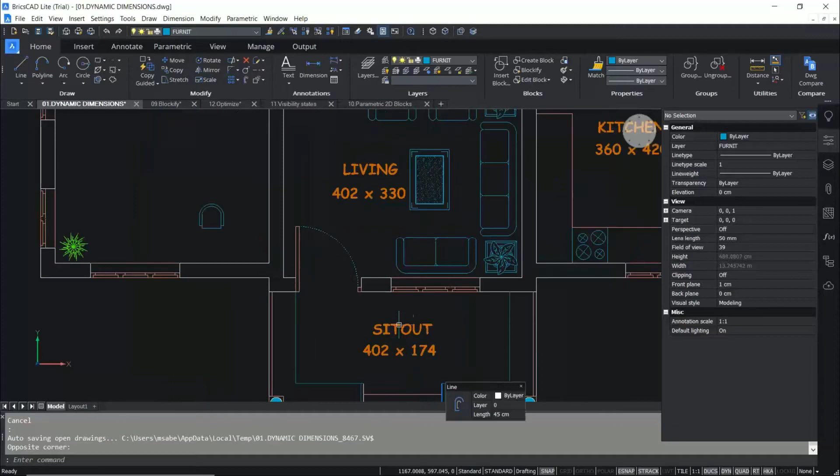First of all, I'll start with dynamic dimensions. Dynamic dimension is a smart feature in BricsCAD with which you will get an interface to specify the length and angle while you create a linear entity.

I'll illustrate it with a simple line. I'll draw a line from here. Now you can see that the length and the inclination of the line is getting dynamically updated. Suppose I want to draw a line with a length of 120 units - I can type that distance, and simply by typing the tab key, I can give the angle, I can specify the angle. Now that line is constructed. So on the go, you could specify the dimensions and create such an entity.

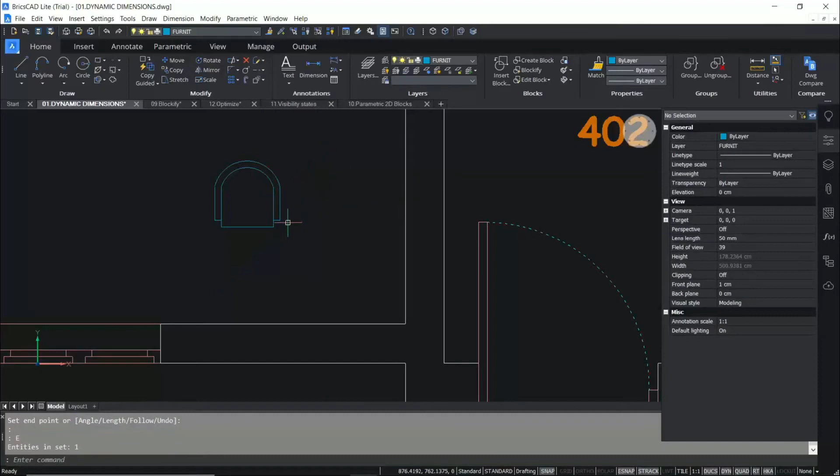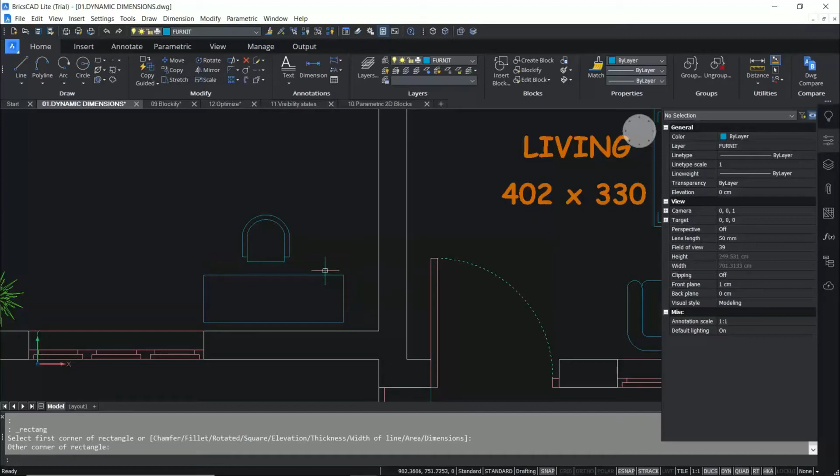Now I'll create a table over here. It's a living room, and we have a chair over here, and I would like to create a table with specified dimensions. So I'll start with a rectangle, and I'll start from this particular corner, and the dynamic dimensions are displayed here. I would like the length of the table to be 120 and the width of the table to be 40 units. Now you can easily and flexibly create such a table. So that is the advantage of inputting dynamic dimensions - whenever you construct a linear entity, this interface will dynamically show the dimensions, which will help you save a lot of time and effort.

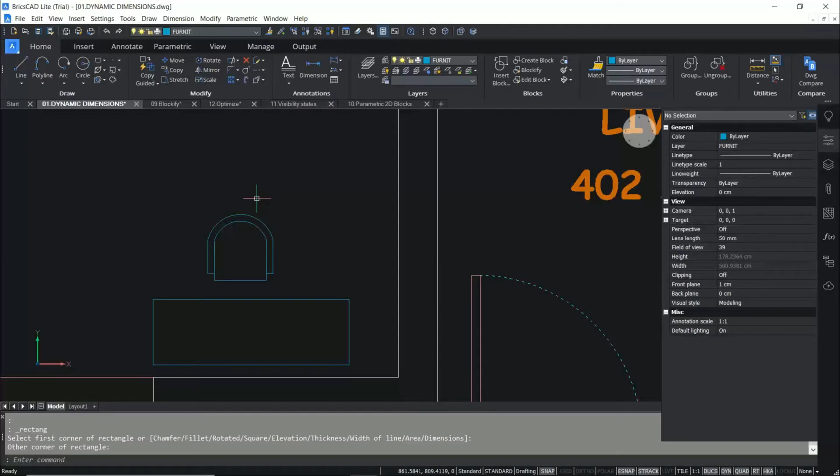Okay, now we come to the next feature called nearest distance. As per the nearest distance, you can dynamically view and change the distance between any two selected entities.

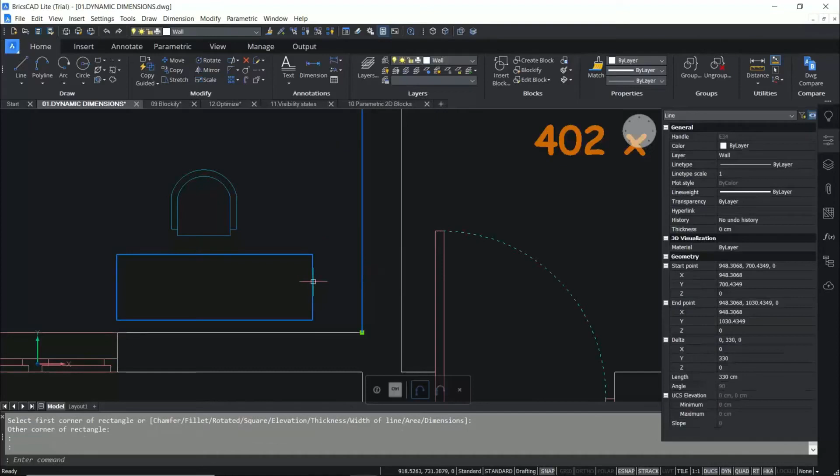For example, I want to move this table slightly towards the wall so that the distance between the wall and the table will be 10 units. All I have to do is select the first entity, which is the wall line, and the second entity, which is the edge of the table. The moment you select these two objects, you will see the distance displayed.

Now I'll change the distance by inputting a value of say 10 units. I'll give 10, and you can see the direction of the arrow here. So the second object will get moved in the direction of the arrow. I'll just give an enter.

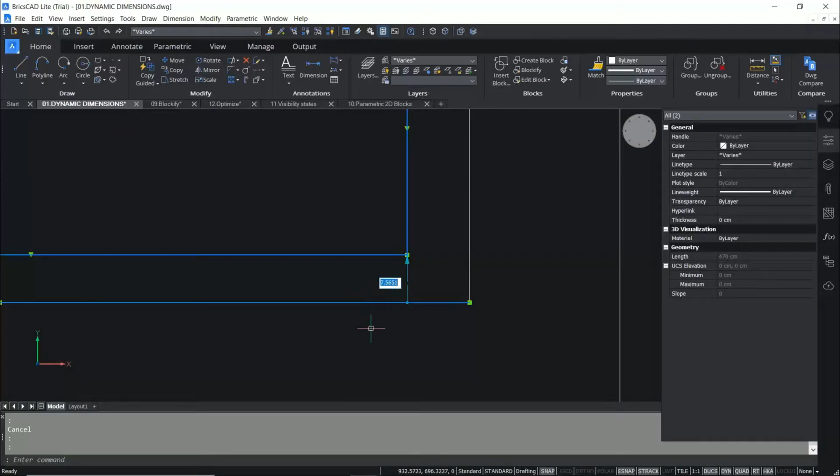So it is moved. Now I would like to again change this distance between this wall and this edge of the table, and you have got the distance displayed, and I would like to change that distance again to 10 units. So if you select any two entities, it will dynamically show the distance, and the second selected entity will get moved based on the distance value specified by you.

Even if it appears like a simple feature, it will help you save a lot of time, because you'll be doing this procedure repetitively whenever you create a drawing, such as a building plan. Okay, so that's a smart feature.

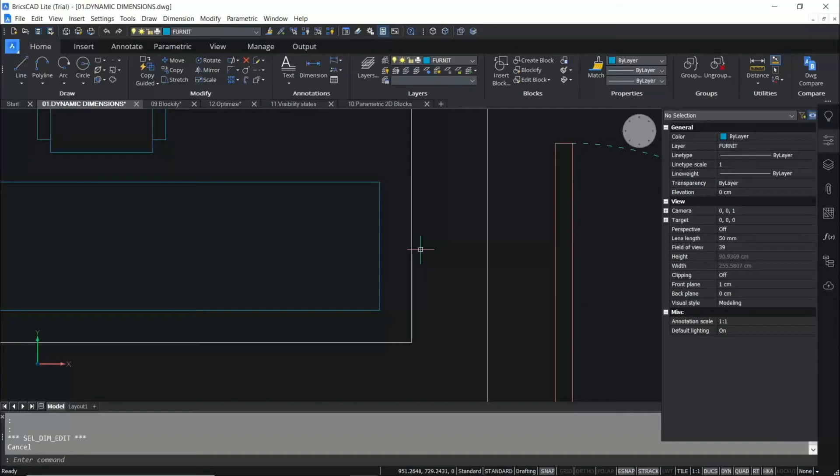Now we'll come to the rollover tips. Rollover tips in the BricsCAD interface shows everything that you need and nothing that you don't. That is, you can get properties and parameters by simply hovering the cursor over an entity.

For example, let me take this particular table. When I take the cursor onto this table, you know that it's a circle. The moment you hover the cursor onto this table, it will show you properties such as color and the layer in which it is created, and it will also show you parameters such as its radius and area.

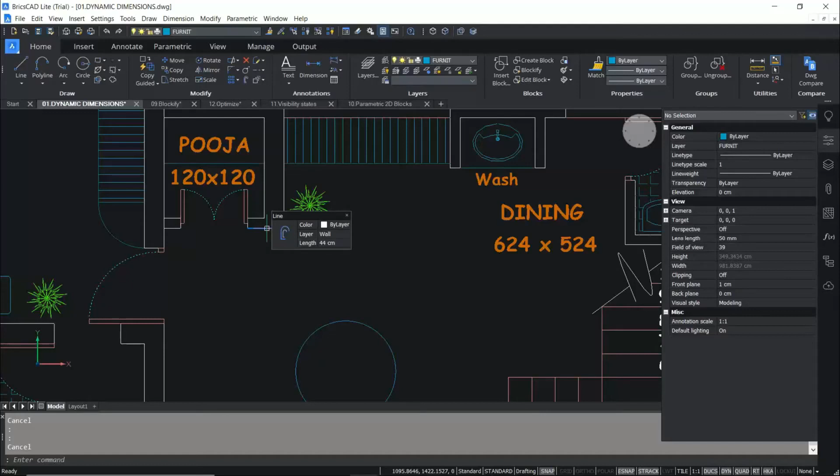So based on the object that is selected, the software immediately gives you these rollover tips. For example, if I take the cursor onto this line, then the parameter you always need, the length, is shown. Now, if I take the cursor onto this text, then you need the parameter as the height.

Now, you can always get extended properties and parameters from the properties panel, which is ready here. So when you select this object, the properties panel will show you a whole lot of parameters, properties such as color, layer, line type scale, plot scale, line type transparency, as well as all the creation parameters.

So this rollover tips feature is again a time saver, because at any point of time, you can get relevant information such as the area, length, radius, etc.

Now we come to the next smart feature, which, to be frank, I haven't seen in any of the CAD softwares I have worked with so far. And this feature is actually built-in, because of the built-in intelligence incorporated in the software. The software, according to me, thinks ahead of you.

If you use this feature, you can save a lot of time and effort by saving mouse movements, unnecessary keystrokes, and all that. The feature is called the quad cursor menu.

I'll explain it with the help of the same circle. I'll take the cursor onto the circle and you will see the quad here. You can get the quad even otherwise, even without hovering on an object, simply by right-clicking the mouse on the screen.

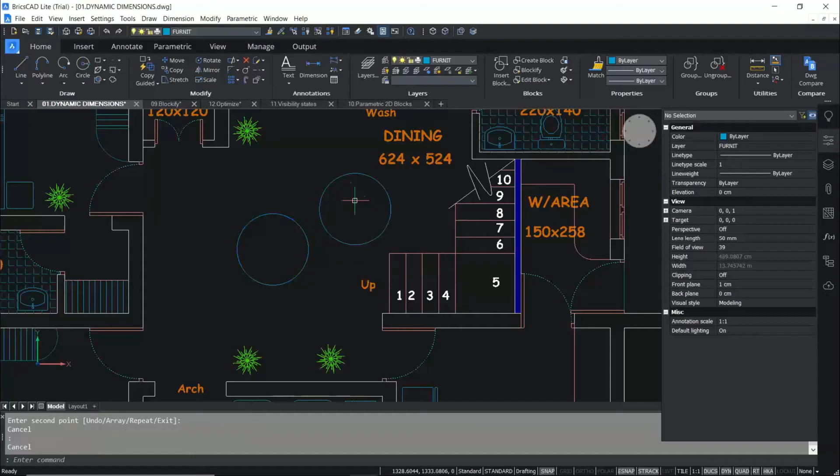Now, this is how you make use of the quad cursor, quad menu. And this quad menu, as I told you before, is a very handy interface which will let you save a lot of time and effort, and it's a real good productivity tool. Now we come to the next smart feature, which is called a hotkey assistant. Hotkey assistant, now I'll erase the circle.

Now, hotkey assistant will give you hotkeys whenever you hover a cursor on an entity. I'll hover the cursor onto this particular rectangle. So you can see a small menu appearing underneath, which starts with control. Then I think you can see that control. And then the first selection is the entity selection, and the second selection is the sub-entity selection.

That means if I make a click now, this entire rectangle will get selected, which is the entity, which is nothing but a polyline. Suppose you want to select a particular segment from here, all you have to do is just hold on the control key, and you have moved on to the sub-segment or sub-entity level selection. Now you have selected only this particular segment of the polyline.

Now, by combining the quad, you can choose only those specific operations that can be done onto that particular sub-entity, which is the segment of a polyline. Suppose you want, you can add a vertex right at the middle of this segment. So I'll just click on that, and I have inserted a vertex right at the middle.

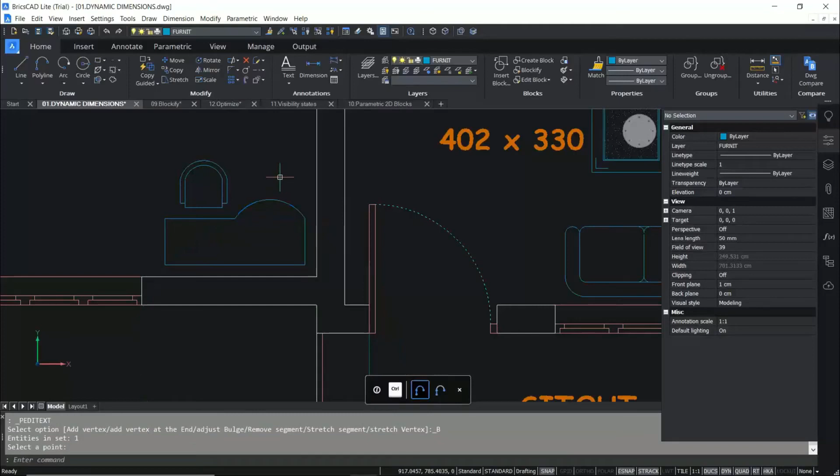Now I'll again move on to this. Again, I'll hover the cursor. I've got the same hotkeys. I'll hold down the control key. Now the subselection will let me select that particular subdivided segment. Now I'm going to execute some editing operation like changing the bulge of that particular segment. So click on that. I have changed the bulge. Thereby, I have altered the shape of that table. So it's all at your fingertips.

As I've told you before, Hotkey Assistant is a very powerful feature using which you can decide whether you have to select the object as a whole, or you have to move on to the sub-object level, and you can incorporate all the necessary editing operations which are specific to that sub-object. So that's a very fabulous feature, Hotkey Assistant.

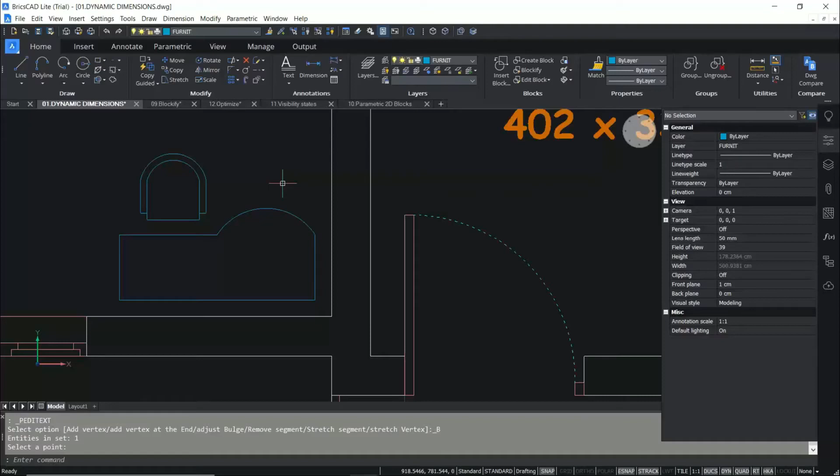And now we come to the next smart feature in BricsCAD, that is called real-time boundary detection. So BricsCAD has got the capability to detect the boundaries in real time. That is a real time saver, according to me, because in other softwares, in order to trace the boundaries, you have to give some additional boundary creation commands.

And boundary creation is always required in computer-aided design because these profiles, which are boundaries, can be used to perform some area calculation and things like that. Now, I'm going to activate this enable boundary detection option over here on top. Now, after that, if you take the cursor onto this, you can see that that boundary is identified. Okay, now I'll create a circle right at the middle of this arc.

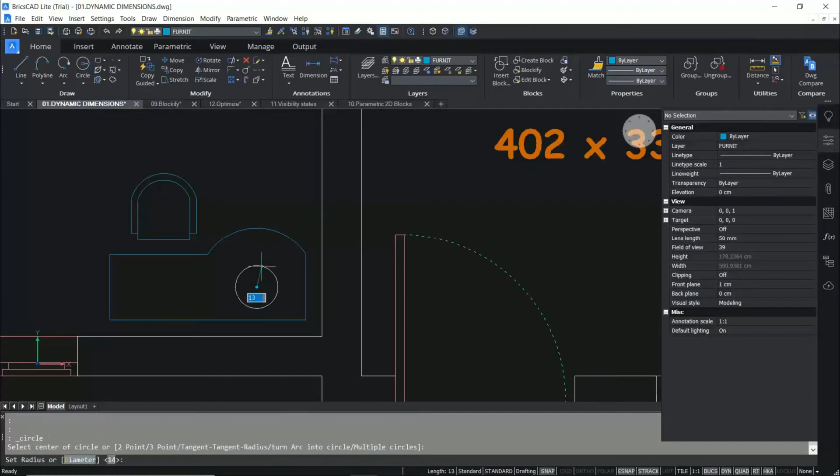Okay, now you can see that simply by hovering the cursor onto this area, that particular annular portion is identified. If I keep it here, that portion is identified, and not only has it identified it, it will highlight it by shading that area. You will also get information such as perimeter, area, etc. So that particular shaded portion's perimeter and area is instantly displayed.

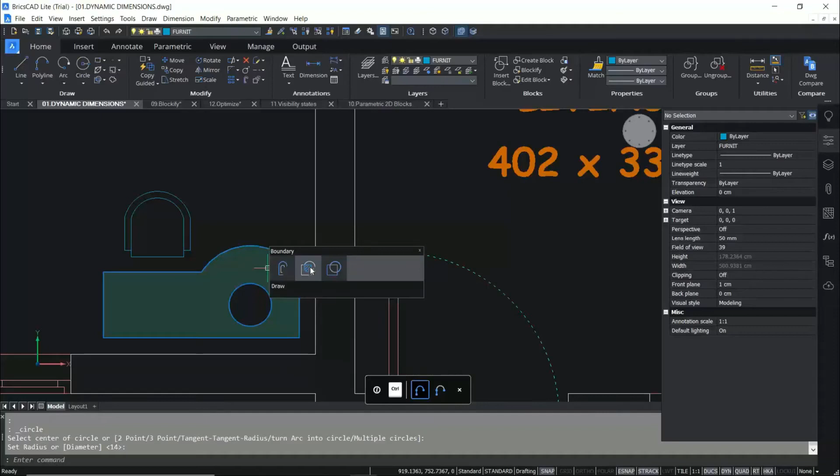Okay. Now, not only that, using the Quad, you can perform a lot of other tasks. For example, you can offset this particular rectangle, this particular profile, through an offset distance. Okay, so we have offset it. Now I would like to perform another operation. I'll hover the cursor onto the circle. Now you can perform a hatching. Just click and it is hatched. Whereas in other CAD software, you have to invoke the hatch command to hatch that area.

So simply by detecting the boundaries, you can see the boundaries highlighted, you can calculate the area and perimeter of that boundary, and you can also do some of the most relevant editing operations such as offsetting the boundary, and you can also perform hatching at any desired area inside the boundary. So these are all a mouse click away. It's that smart. I'm sure you will definitely enjoy the real-time boundary detection in BricsCAD because it's a really good productivity tool.

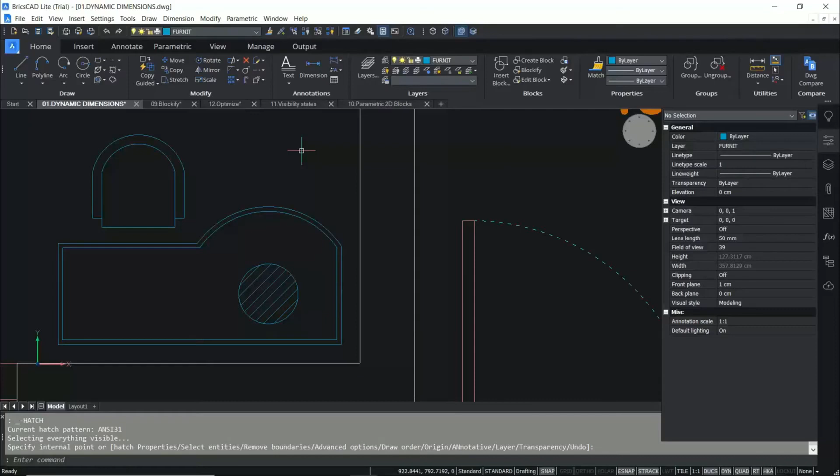Thanks, Abir. Yeah, those are really great tools that you showed us just now. They're a great start on some of the tools that you wanted to show today. I'm also really excited about that boundary detection, which I also use a lot. I know that you were also quite excited about some of the other tools relating to copying and moving entities, which are two of the most commonly used commands in the industry. So do you mind showing us those tools that can help us copy and move entities in a smarter way?

Yes, Claire, I'll demonstrate that feature. That is one of my favorite features. Copying and moving objects are among the most commonly used editing commands in any CAD software, and we are quite used to the normal conventional copy command. I'll demonstrate that first so that you'll be able to appreciate the copy guided feature better. So first of all, I'll execute the normal copy command. I would like to copy this window from here onto this vertical wall.

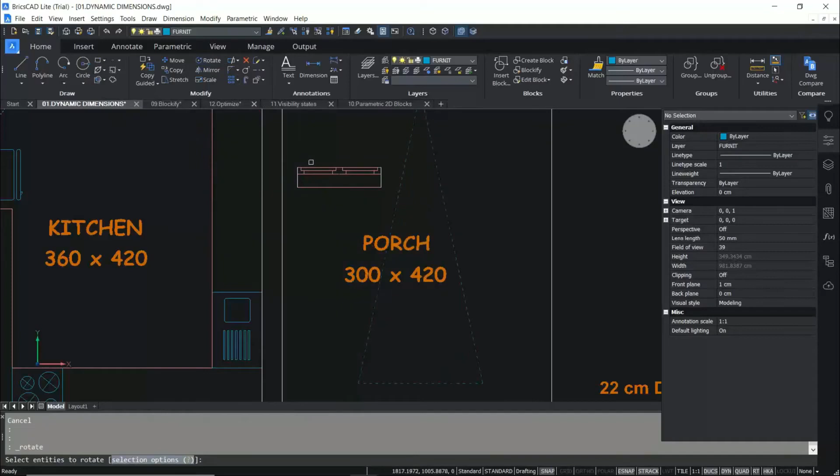So you give the copy command, select the base point, and take the cursor onto this area. Then you have to give a rotate command, select the base point, give a rotation angle, then again you have to move it. Okay, these are the conventional tasks. In the process of bringing that window onto that wall, I have to use 3 editing commands. Or else the alternative is to block it, then insert it. But even blocking and insertion need some time, and there are some procedures involved.

But in copy guided, that's not the case. All these operations can be done in a much smarter and more intelligent way. So I'll go to copy guided and select this window. After selecting the entities in copy guided, their relationship to their reference curve will automatically guide you in inserting them at different similar locations. So this particular line is the guideline which I have selected. I'll repeat it once more. I'll start copy guided and select the object within a window.

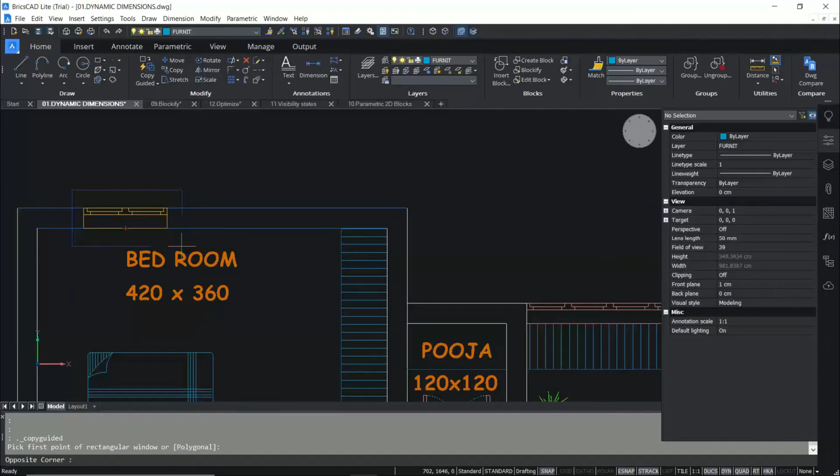While selecting it, you can see that the color of the two wall lines changed to blue, which means those two wall lines are guide curves. And now you can see the arrows here. This is the normal state when you keep it here. But when it comes to this area, see, it is getting automatically aligned with that area. Now I'll just insert a copy of it here and one more copy here.

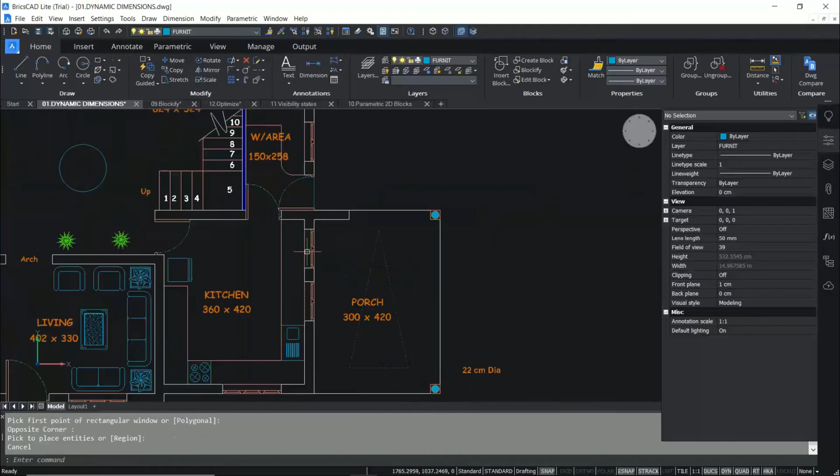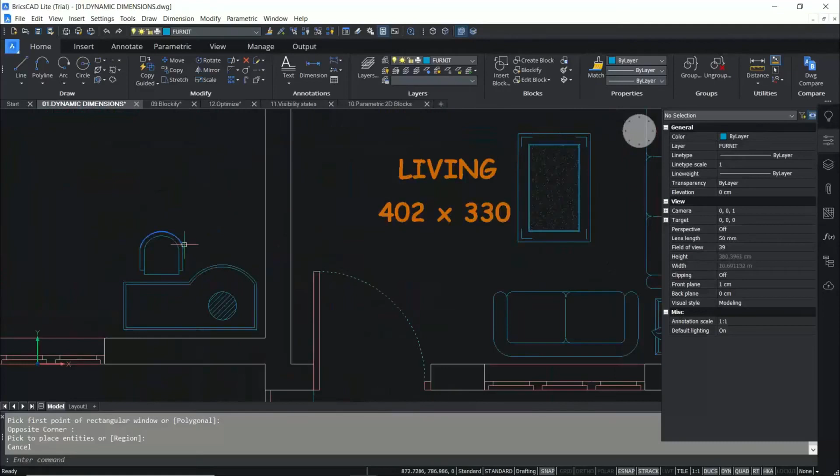And not only that, it has cleared this area. It has performed all sorts of cleanups. Otherwise, after inserting, you have to perform trimming, erasing and all, right? You have saved a lot of time because the cleanups are done simultaneously. So copy guided is a very powerful and intelligent feature. And I'll illustrate copy guided with one more example.

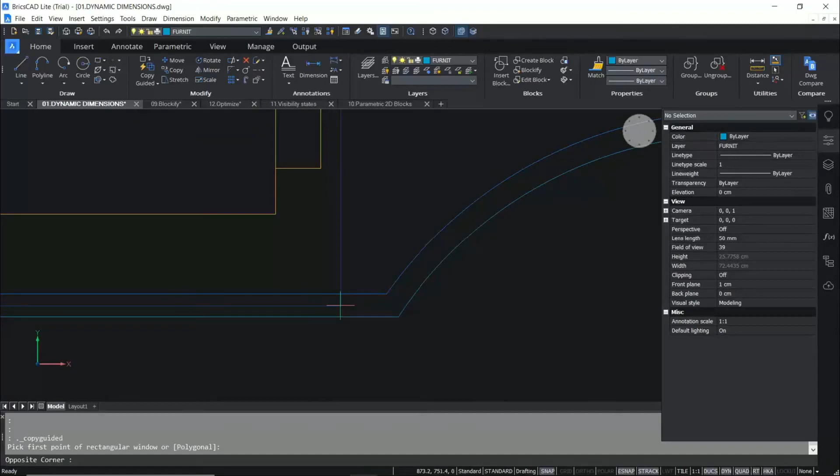Let me just copy this chair. So I'll go to copy guided and select this chair using a standard window. This time I'm going to use this edge as the guideline. You can see that the color of that particular edge changed. Now I'm going to place this around this dining table.

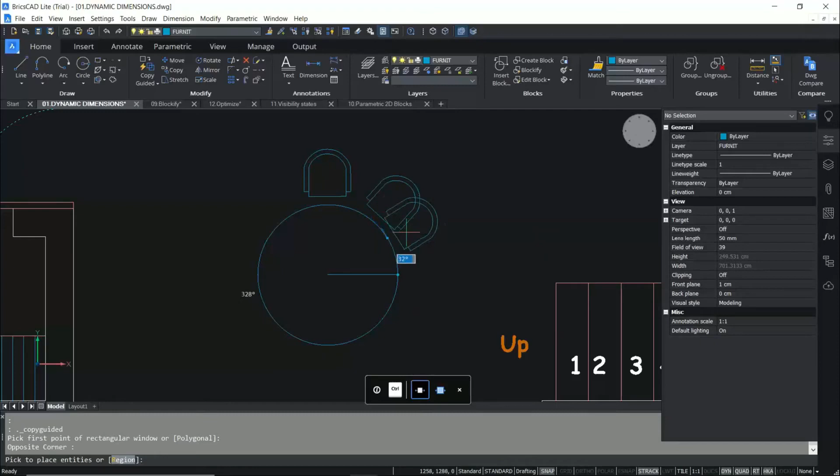You can see that it is aligned automatically along a curve, because the shape of the dining table is circular. Now I can specify an angle to precisely locate it. So it's 90 degrees, it is located at 48 degrees, and it is 0 degrees. Likewise, simply by moving it, you can align it along that circular path. So this is the power of copy guided. There is no limit to its application. I'm strongly convinced that it is a real time saver because it replaces several editing commands.

Now we come to Move Guided, which is a relatively new feature because it was introduced in the latest version, V21 of BricsCAD. It is similar to Copy Guided, but after selecting entities, their relation to their reference curve will automatically guide you to moving the entities to a similar location. In Copy Guided you copy it, whereas in Move Guided you move it. That's the difference. In addition, Move Guided will also let you simply perform cleanups in a given area. Let's see that first.

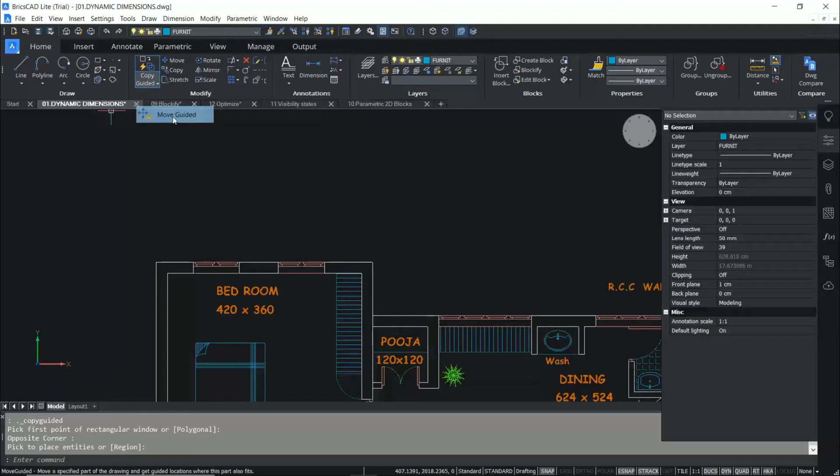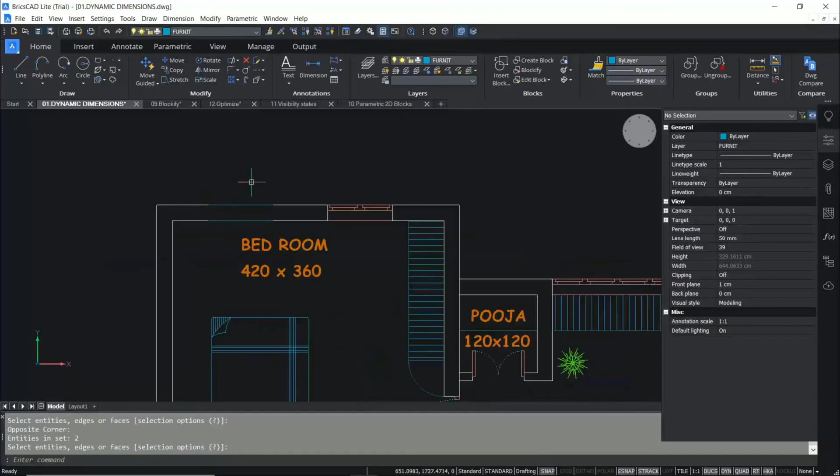So I'll go for Move Guided from here. Now I'll select this window. Suppose I don't want that window there. Conventionally, you have to erase it. Let's see the conventional procedure. I'll erase this first conventionally. Then there's a gap. I have to fill it by drawing lines. Then I have to erase these vertical lines. So this is the procedure involved.

Whereas if you use Move Guided, all you have to do is click on the Move Guided command, select it using a standard window, and just locate it outside the drawing. See what happened. All the patch-ups, cleanups, everything is done in one go. So this is one of the basic applications of this command, which has attracted me.

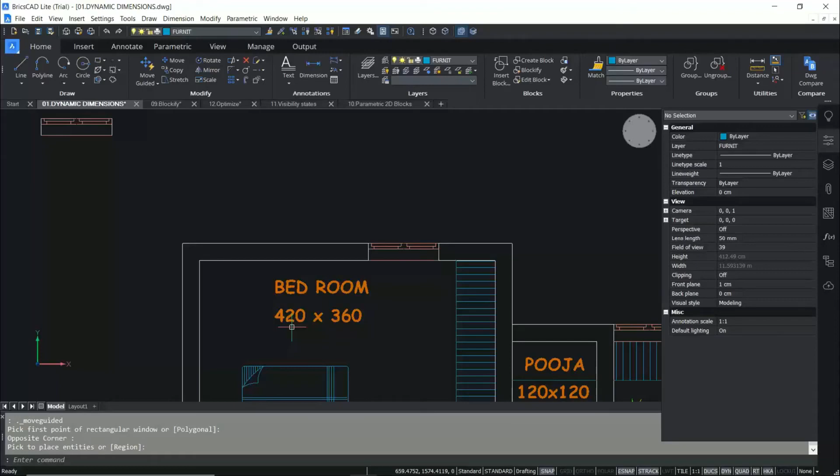Another thing, of course, you can move it and locate it precisely at a different location. For example, I'll move this using the Move Guided command. I'll select this window. Now I would like to keep it right here. See, it has been located at the different location. Orientation is properly adjusted, and the cleanup is also automatically done in the area from where it was taken. So everything in one go. See how much time and effort you have saved.

So Move Guided is one of the fabulous features of the latest version of BricsCAD V21, and in fact you can explore these features on your own, because you can download BricsCAD. You will get a 30-day trial version. You can try out these features. It's very simple but very powerful.

Now, Claire, do you want to say something? Yeah. Looks great, Sabir. Move Guided is really impressive. I share your sentiments about Move Guided. It's really cool, and it saves a lot of time. And I know that you still want to show us more features that pertain to blocks, parameters, and other optimization tools. I see you still have a lot of files there ready for us to see the magic. So proceed. Just show us what you've got. Okay, thank you, Claire. I'll move ahead.

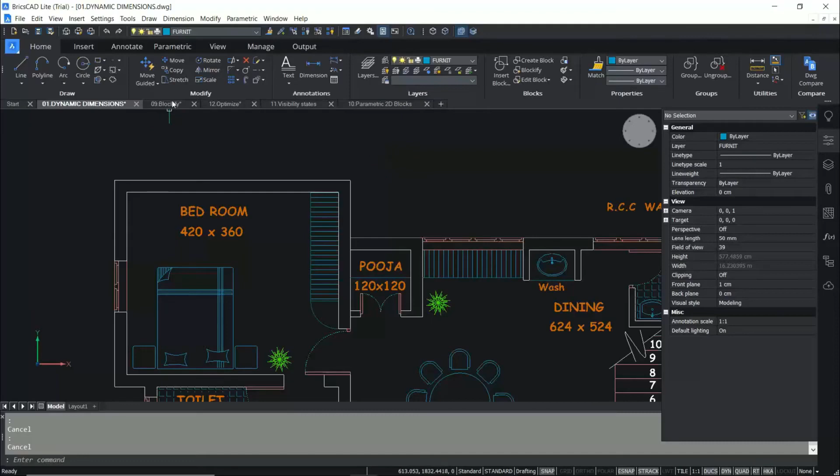Now we'll see another fabulous feature in BricsCAD, that is Blockify. Blockify will let you create a block. The software will automatically create a block for the user after identifying similar geometry in a drawing. For some of you it may be a new feature, I'm sure. I haven't seen this feature in any other CAD software. Putting it simply, it's just the opposite of the Explode command.

I've received several queries from my students, because at times, to reduce the file size, they explode almost all blocks in a drawing, since that is one of the procedures by which you can reduce file size. After exploding, at some point they change their mind and want to convert all these objects back to blocks. That's a helpless situation. Whereas Blockify is a feature which will let you do this.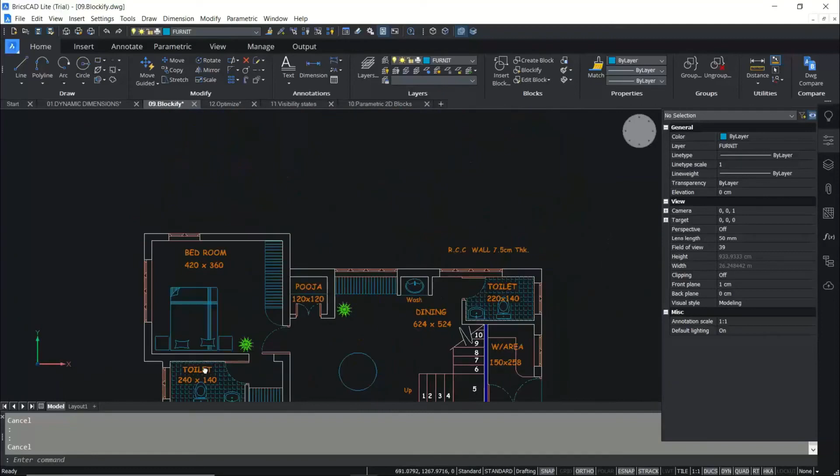I'll show you that. You just click on Blockify and I'll select this particular 2-panel window. I've got several such windows in this drawing, but these windows are in the exploded state, so they are all different objects. This is one window, second, third one. Likewise, I have the fourth, fifth, several such windows. It's a double-storied residence plan. So I'll go to Blockify and I'll select this object, this window.

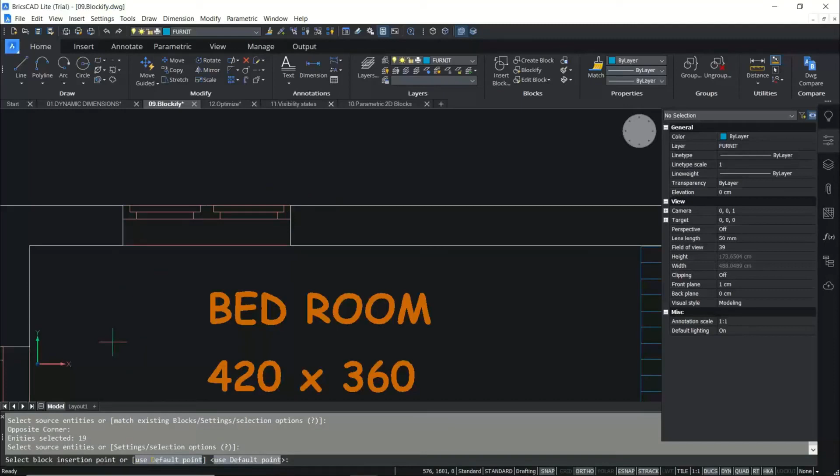Okay, now it'll ask you for the block insertion point, because a block is going to be created. So obviously you have to specify the insertion point, right? So I'll pick this insertion point. Then it'll ask you where you want to search it. I want to search for the similar geometry in the entire drawing, right? It will scan the entire drawing. So entire drawing is the default setting here. So you can just give an enter.

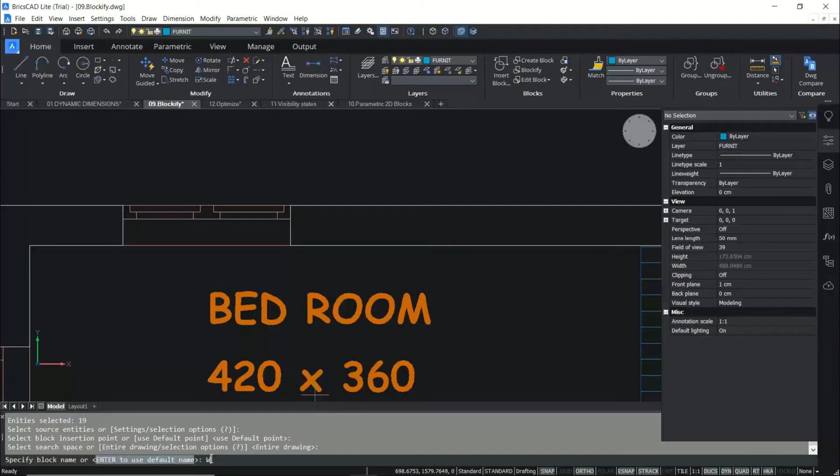Now it'll ask you for a block name. Obviously you have to give a block name because you're going to create a block. So I'll say W2. It's a 2-panel window. Now just give an enter. See, it has scanned the entire drawing and the number of block inserts is 9, because the software has identified 9 similar geometries in the drawing.

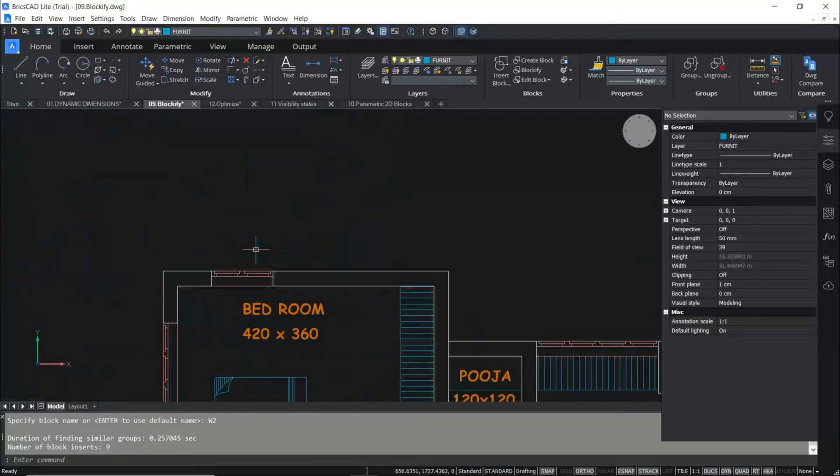Okay, let's manually first locate it. This is a block already. And this is again a block. Even this is a block. Now there's a feature in Quad. I'll select it and I'll go to the select menu in Quad. Here you have an option called select similar, which will let you select similar objects. In one go, you have selected all the similar objects in the drawing. So here also we have it.

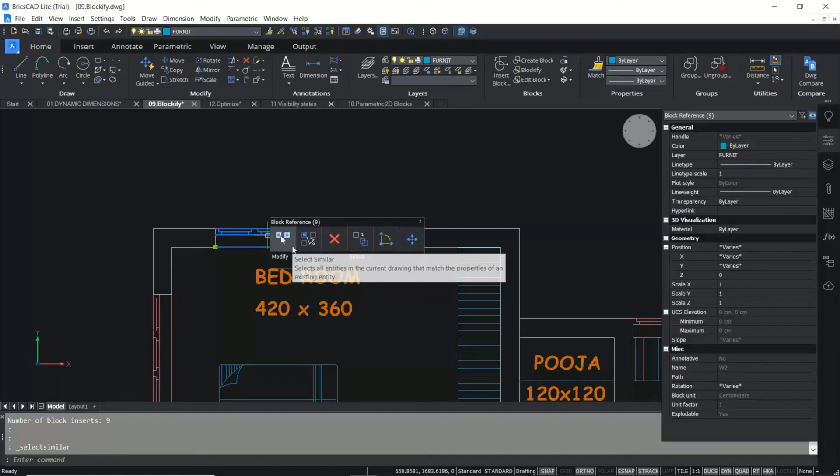Now you can isolate it. So I'll go to modify, select. Then you can isolate the selected objects. Just click on that. See, you have isolated all the selected objects. And all these are blocks. Okay. These are all blocks. So as I told you before, you have just done the opposite of explode by blockifying the objects.

And another interesting feature of Blockify is that it's so fast and accurate, no matter how complex the object is. For example, this particular tree, which I've kept in the interior of the house, is made up of several objects, right? It is not following any pattern. It's all scattered because it's a representation of a tree. Let's see how we can blockify this.

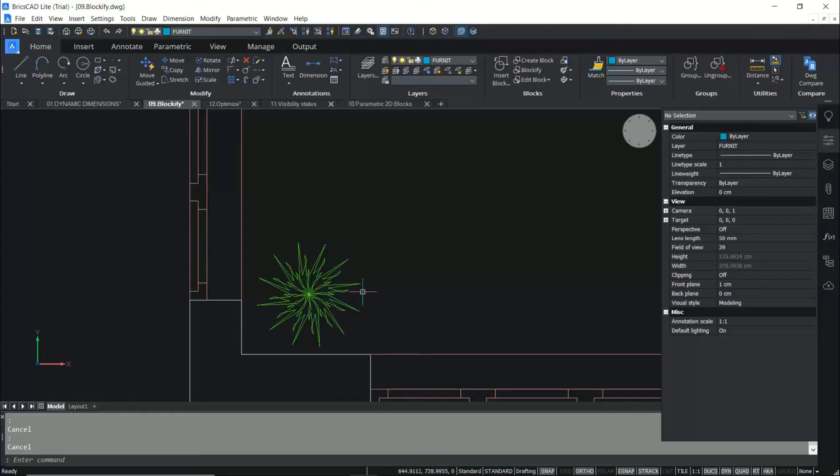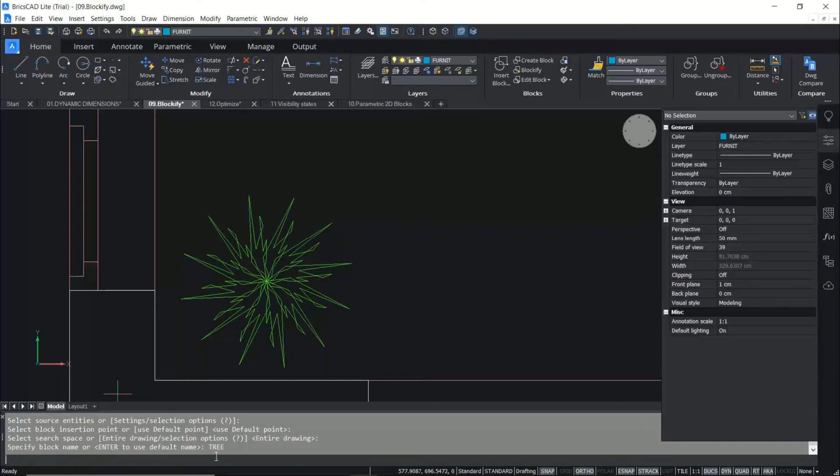So I'll click on Blockify and I'll select this tree. Okay. Then it'll ask you for the insertion point. I'll define it right at the center of this tree. Then I'll take the entire drawing. Now I'll give a name. I'll call it tree. 12 trees are identified. See, it's all done in 1 second. You should remember it. And that's the processing speed of this software.

There's another feature which has attracted me. Okay, I would like to say something about the processing power of BricsCAD because it's a different kind of coding which is done in the software. Okay, so the coding is compacted. The file size of the software is very small. It occupies less memory space when you compare it to other CAD softwares. That is one of the features which has attracted me.

Okay, if the memory space is less and if the memory management is optimal, then obviously the performance of the software will also be much better in a given platform. Okay, so even on low-end machines, you can install BricsCAD. When you compare it to other softwares, it will give you better performance.

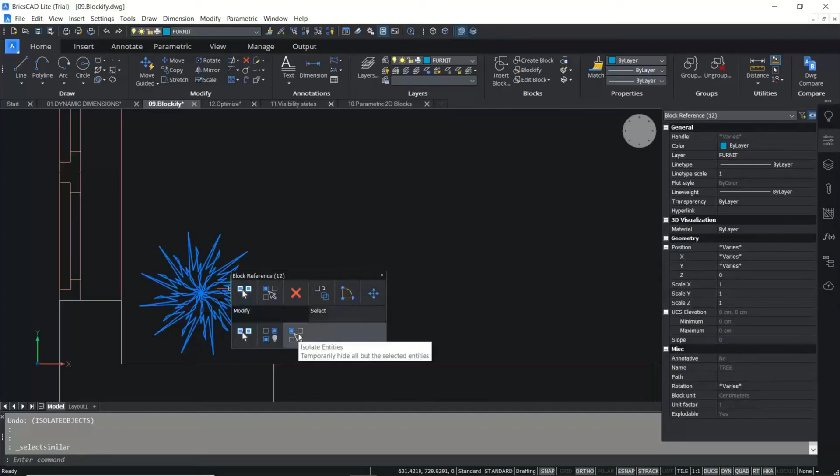Now coming to, I'll select this. No, let me just repeat the same process of steps which I've done before. Sorry, I'll select this. I'll go to select similar, then select. I'll go to isolate entities. See, all these interior trees are converted to individual blocks. So that is the Blockify feature, one of my favorite features in BricsCAD.

Now we come to another very interesting feature in BricsCAD, that is called parametric 2D blocks. At least some of you must have used dynamic blocks, right? You know the capability and functionality of dynamic blocks. Dynamic blocks will let you perform some extended tasks inside a block. Sometimes you may also be in a position to incorporate a little bit of intelligence in the block, but you have to do a lot of tasks for that in dynamic blocks.

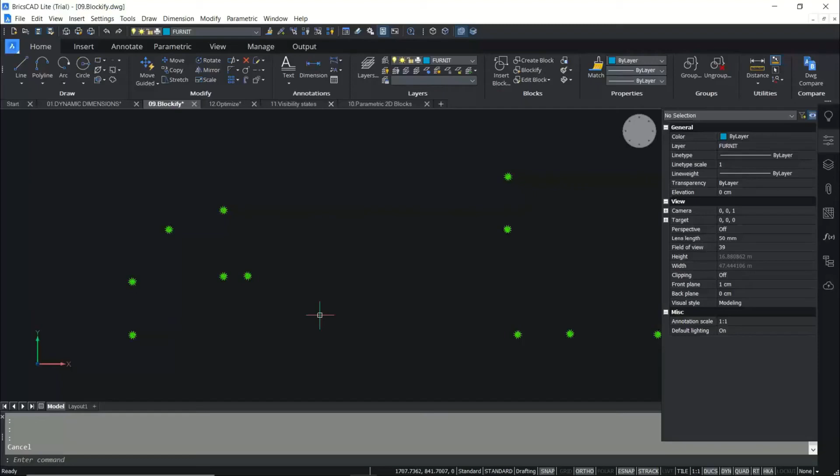Whereas here, let's say parametric blocks. So I'll click on parametric blocks. I'll explain it with this particular office drawing. It's an office floor plan, and we have a number of tables and chairs over here. And there are different designs of chairs. What I'll do is I'll choose this particular office chair. And you know that when you click on it, it's all made up of several individual objects. It's clear that it is not a block.

So first of all, I'll blockify this object. So I'll click on Blockify and select all the entities in the chair. And I'll just give an enter. There are 21 entities in this. And now I'll give an enter. Now it will ask you for a block insertion point. I'll choose this point as the block insertion point. Then I want the entire drawing to be scanned. Okay, now it will ask you for a block name. I'll call it office chair.

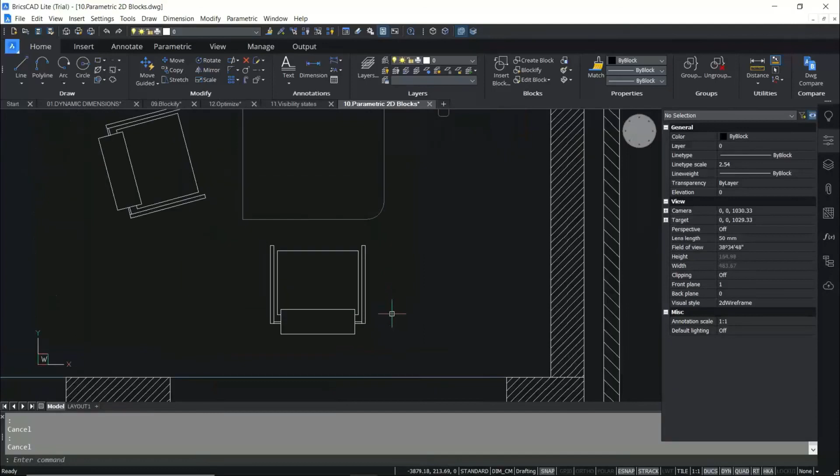Oh, it's converted already. It's okay. Fine. Now this is a block, and this is again a block. It's a similar object. Okay, it's again a block. Fine. Now what I'll do is I'm going to edit the block. In BricsCAD, you can simply edit a block by double-clicking on the block. Just double-click. You will get the block editor here.

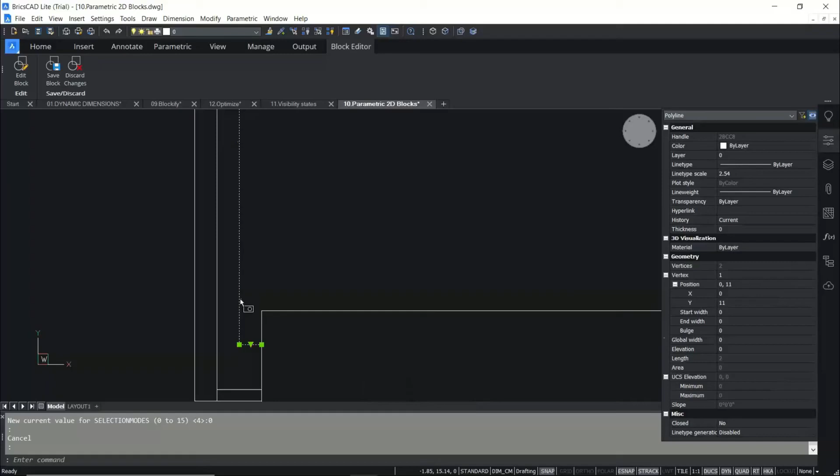And I'll just give OK. Okay, there's a block editor interface. Now what I'll do is I'll select a few entities in this. I'll select this horizontal, this vertical line, and this vertical line, this one, and this one. Now, if you go to parameters and constraints, you can see that none of these objects are constrained and there are no parameters associated.

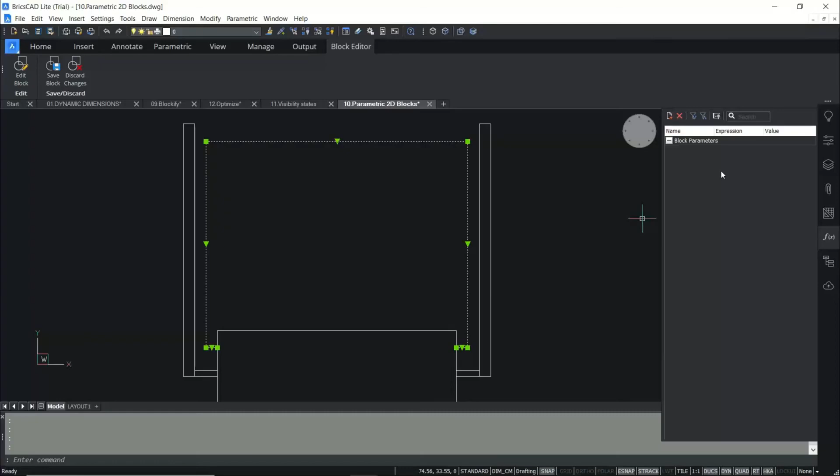Now I'm going to give an auto constraint. It's a very simple task. You go to parametric and here we have an auto constraint feature right on top. Just click on that. The moment you click on that, you will see two constraints, the two parameters displayed here. One is D1, which is 46. D1 you can take, for example, as the length of the chair, and D2 you can consider as the width of the chair.

So you have to give some meaningful names here for your understanding. So what I'll do is I'll just double click and rename this. So I'll call D1 as length, and I'll double click and I'll call D2 as width.

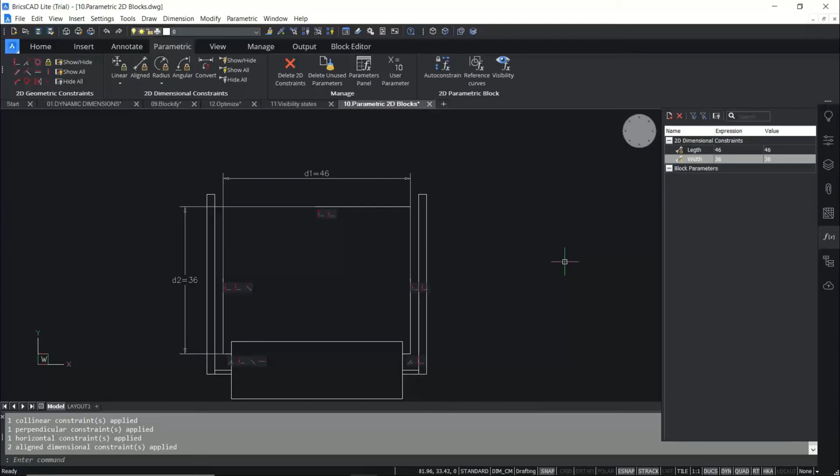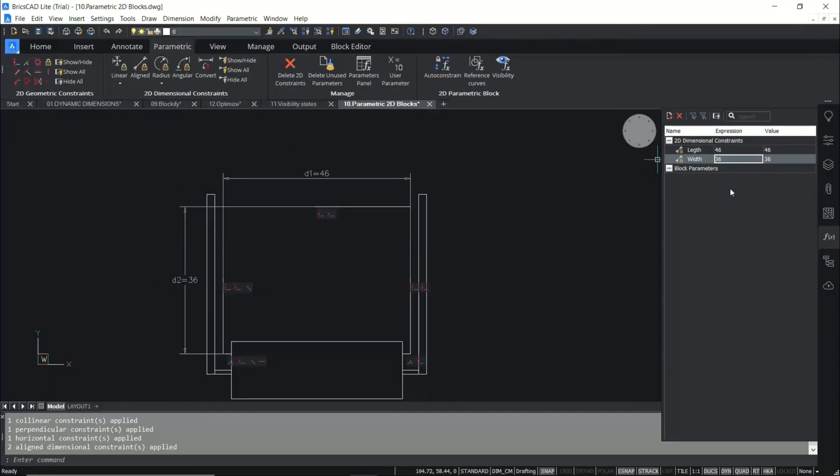Now, if you need any clarifications on these parameters, you can dynamically see these parameters changing by animating it. So just select the length, right click and animate. This is the length. It will show you an animation, so you can be sure that it is the length. And right click and animate, it is the width. Now I'm going to save this block. So I'll go to block editor and I'll save the block.

So you can see that these parameters are attached to all the blocks which you have defined. But that is not the end. What you can do is you can select any desired blocks. For example, I'll select this block and this block. For these two blocks, I would like to change the width. I would like to increase the width.

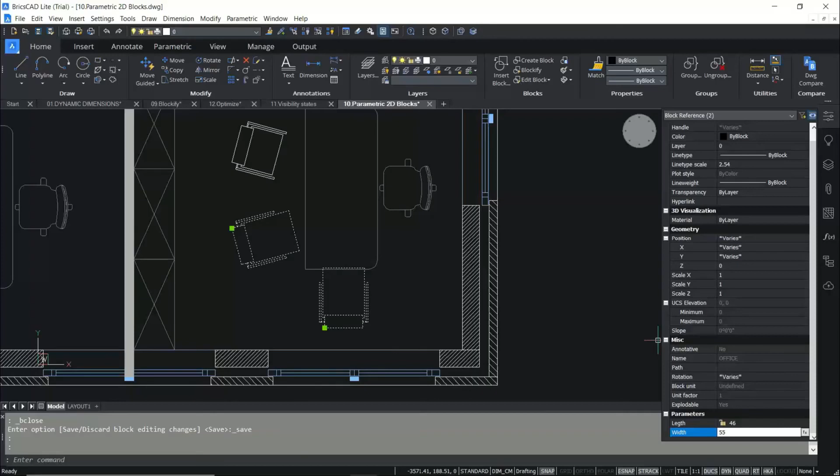So what I'll do is I'll go to the properties panel, and the width parameter is 36. Just concentrate on these two chairs. I'll make it, say, 55. So you can see that these two chairs' width has dynamically changed. How cool is it, right? You don't have to go through the procedures we normally do in dynamic blocks. It's so simple.

I'll just recapitulate what I've done. I've first converted these lines in the chair into blocks. Then I edited the block. Then I auto constrained it. Then two constraints are attached, length and width. I've renamed them, animated them, saved the block. Then simply by using the properties panel, I have changed the parameters.

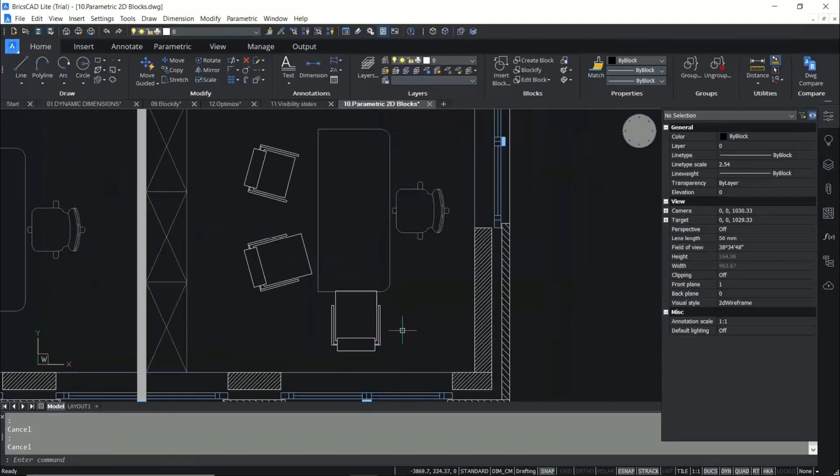These two parameters are automatically given by the software because I've clicked on the auto constraint. But if you want, you can also specify any parameter manually. For example, you can increase the width of the handle, length of this handle, the width of this back of the chair. Every parameter can be flexibly changed, and you can see these parameters in an animated manner. So it's a very cool feature, the parametric 2D blocks. I love this feature.

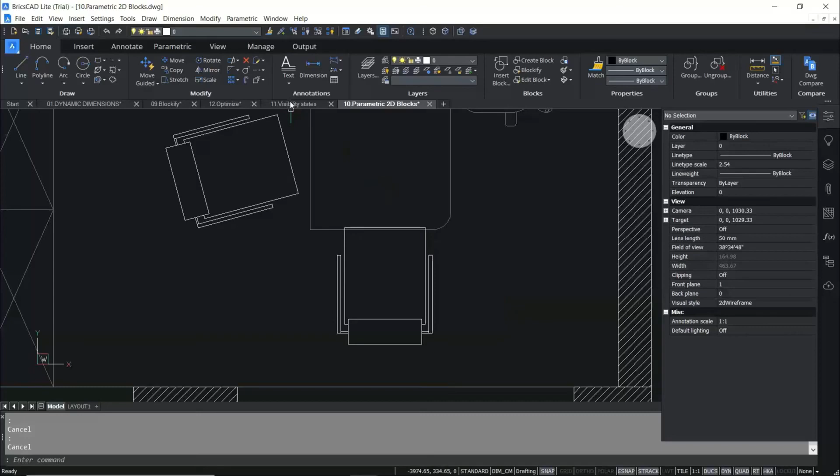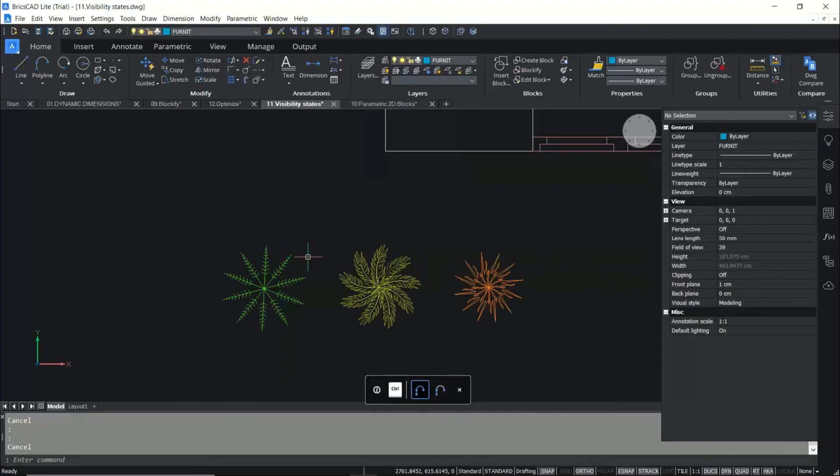Now let me come to the next interesting smart feature related to blocks that we call visibility states. I would like to use this particular drawing to explain visibility states. My requirement is to insert a few plants in the interior of this house. I've got 3 plants here. These 3 plants are just made up of several entities, and these are not blocks. So first of all, I have to convert these into blocks. So I'll go to the block command. Then I'll call it trees.

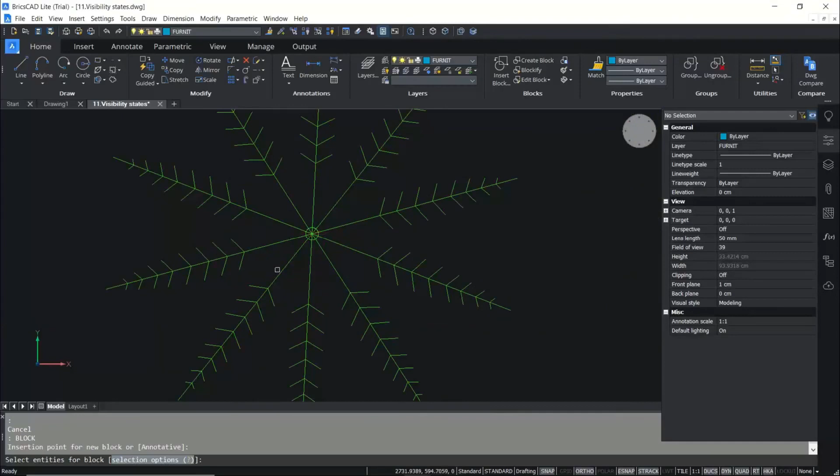Okay, then I'll specify the insertion point over here. Then I'll select these entities. Okay, it's all converted to a block. And now I'll just double click on the screen to edit the block.

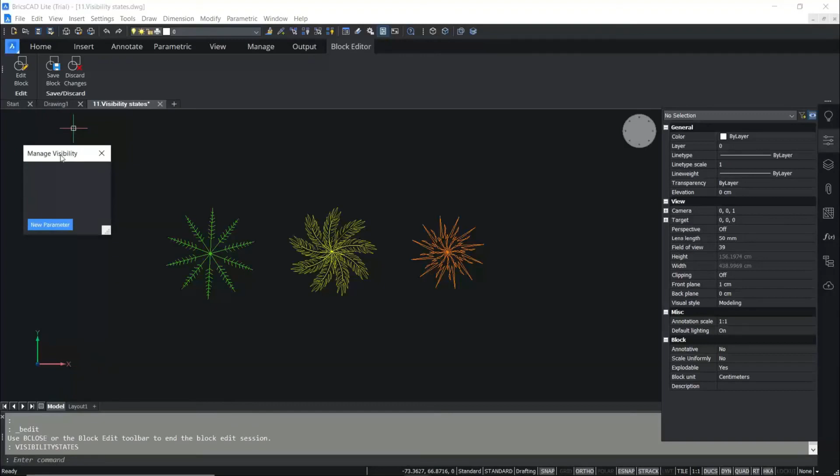Okay, now I'm going to give a command that is visibility state. Visibility states command. It will give you a manage visibility panel. Over here, I'm going to add new parameter. So click on new parameter. The parameter is tree type.

Tree type. I've already defined the tree type. Right click. Add a state. The first state I'll call it tree 1, as I've done before. Second one, add state, tree 2. Third one, add state, tree 3.

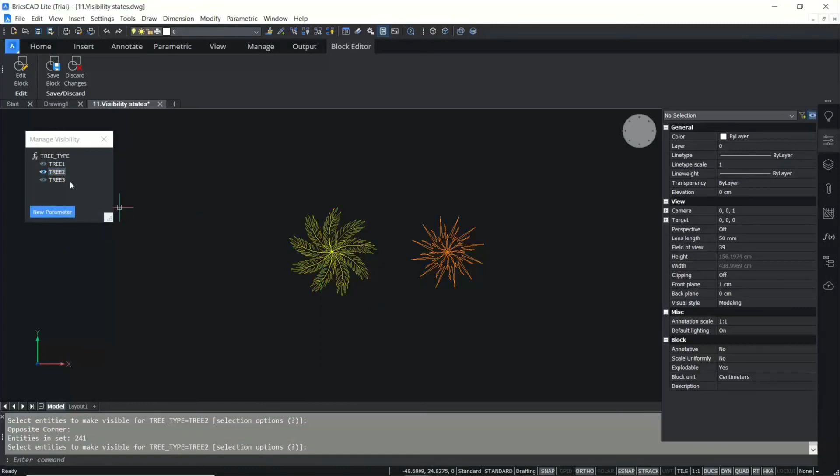And select the first one. Select visible objects. I'll make this visible. Tree 2, select visible objects, entities. I'll make this visible. Tree 3, select visible entities, this one. Okay, now I click on tree 1, that's visible; tree 2, that's visible; tree 3, that's visible.

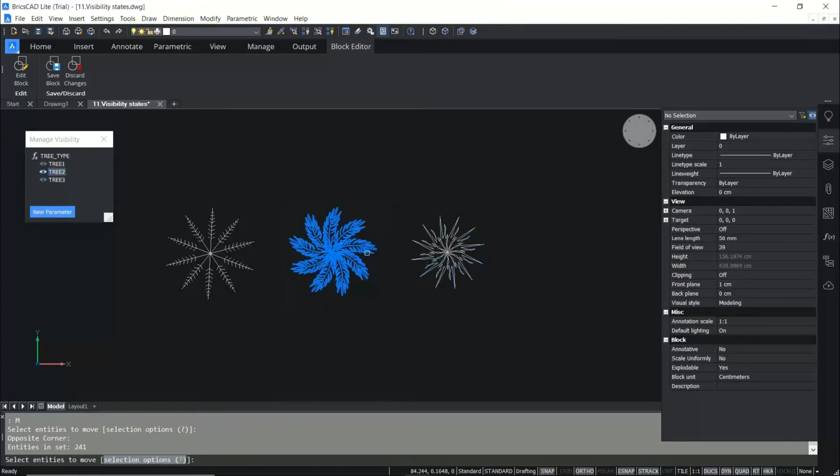Okay, now I click on tree 2, then show invisible. Okay, then I'll move this one to the same location. Then tree 3, show invisible is already on, so this is displayed. Now move this and keep it in this location.

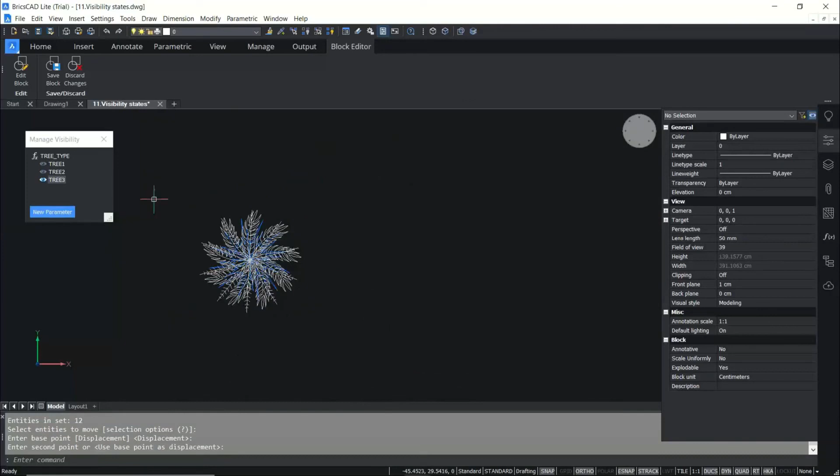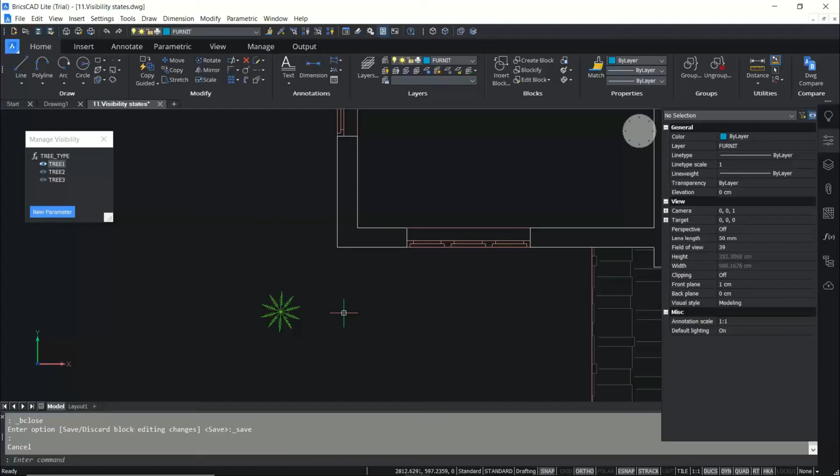Now I can turn off show invisible. Okay, now you can see that these trees are in the same location. Okay, now I'll go to save changes. I've saved this. Now there's only a single block here, and in this block the rest of the blocks are integrated. But the visibility can be controlled by the user using the properties panel.

So I'll copy this tree into different locations. I'll copy it over here, and onto this living room. I'll take 2 copies. Now I'll also take 1 more copy of this onto this bedroom.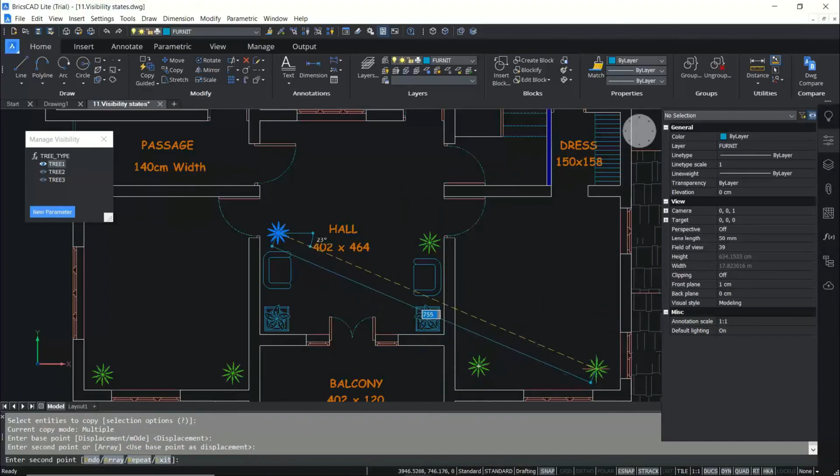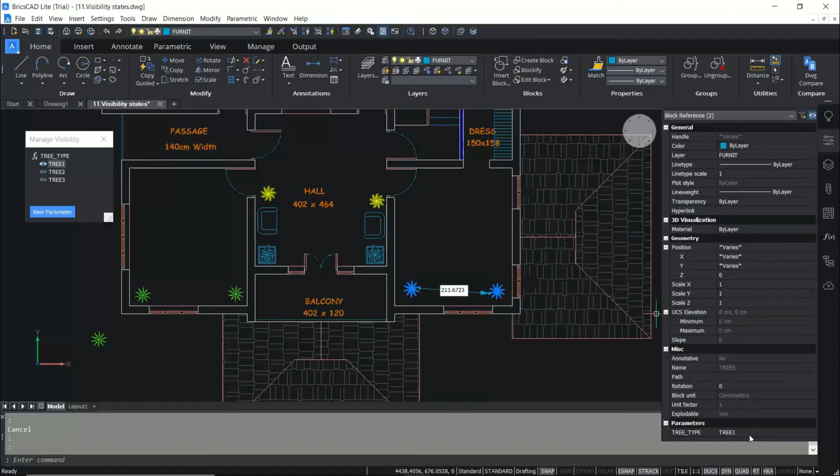Now I want the tree in the living room to be of the tree 2 type. So you select these 2 trees, go to properties panel, and make it tree 2. So those 2 trees are tree 2. Now I'll select these 2 trees and I want those 2 trees to be tree 3 type. So convert to tree 3.

So likewise, you can integrate as many blocks as you want in a single block, and simply by controlling the visibility states, you'll be able to manipulate these blocks so that, as per your requirement, you can make visible any desired block at any desired location. I think it's a very powerful feature. So that's all about visibility states.

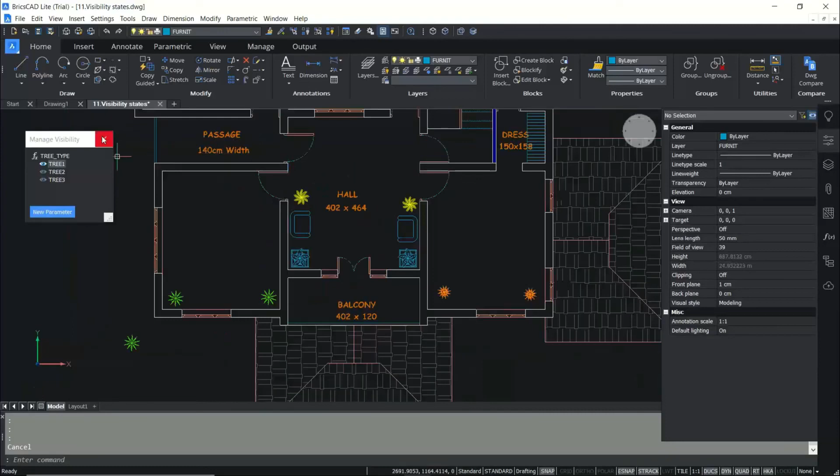Now we come to the next feature in BricsCAD that will let you optimize your drawings. I'll explain it with this particular file. When you look at this drawing, you can see it's made up of a few lines. But the drawing can also be as complex as this. This is a simple drawing. I'll show you one more drawing. This drawing can be as complex as this.

So how do you get such a drawing? What happens to such drawings? Whenever you perform conversions of files, like AutoCAD DWG, BricsCAD DWG is a very powerful format. It's a well-known format, and this DWG file interoperability is also something to be appreciated, because these DWG files can be used for 3D printing purposes. It can also be exported to other file formats, and you can import DWGs.

You can also get DWGs through raster to vector conversion. That is, if you have a blueprint drawing, there is a procedure by which such blueprint drawings can be scanned and converted to drawing file formats. There can also be situations where you import a PDF file directly into AutoCAD.

In all these situations, the files imported may sometimes be erroneous. Sometimes there may not be perfect horizontality, and the lines may not be perfectly vertical. There can be gaps and overlaps, just as you see here. In such a scenario, what you normally, conventionally do is manually interfere with all this.

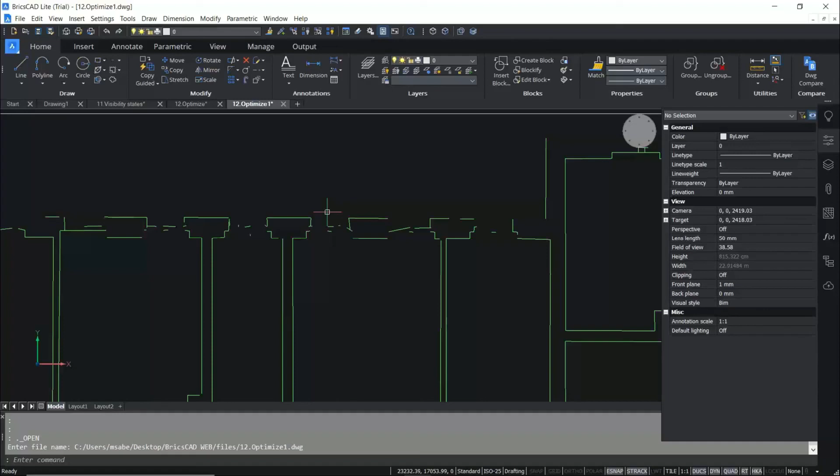Because I have done it myself before. After scanning, some of my clients bring blueprint drawings, and I scan those drawings in an A0 size scanner. Then after scanning, you get such line drawings which are broken, literally erroneous. Then you have to manually do a lot of manipulation to correct it and convert it into a proper DWG file. Whereas if you use Optimize, it's a real time saver.

You can select the drawing, or you can give the Optimize feature. You can click on Manage and click on Optimize feature. You will get this Optimize 2D Lines dialog box, meant for 2D lines. Here you have to first select the drawings. So I'll select the lines in the drawing, or you can choose the entire drawing if you want the entire drawing to be optimized.

Now what I'll do is, using this arrow key, I'm going to select the entire lines using a standard window. It will tell you that 7 lines are selected. Now you can choose the reference angles to define the horizontal, vertical, and diagonal properties.

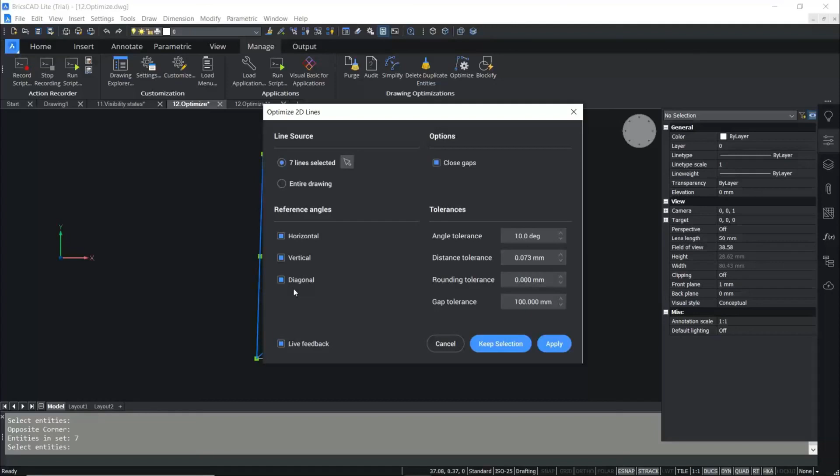This drawing, as you know, is a bit of a mess, and lines are not horizontal and vertical, and there are gaps. So there are different options to control optimization behavior, different parameters to control how it optimizes.

Now these lines are slightly inclined. If you want to make these lines perfectly horizontal or vertical, I'll give an angular tolerance of 10, or even 7 is okay. The distance tolerance can also be specified, and gap tolerance can also be specified. I'll give it a gap tolerance - this is not the default value because I was experimenting with some other file before. The default value here is 0.05. I'll apply it.

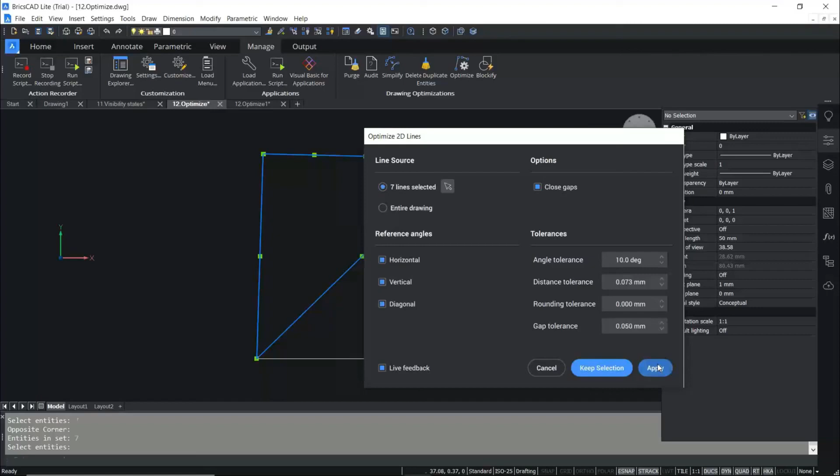When you apply it, you can see that now these two lines are perfectly horizontal and vertical, and this is a perfect diagonal because it has adjusted. This optimize feature has adjusted the inclination of lines in such a way that the lines are perfectly horizontal and vertical. But still, you can make out a gap over here.

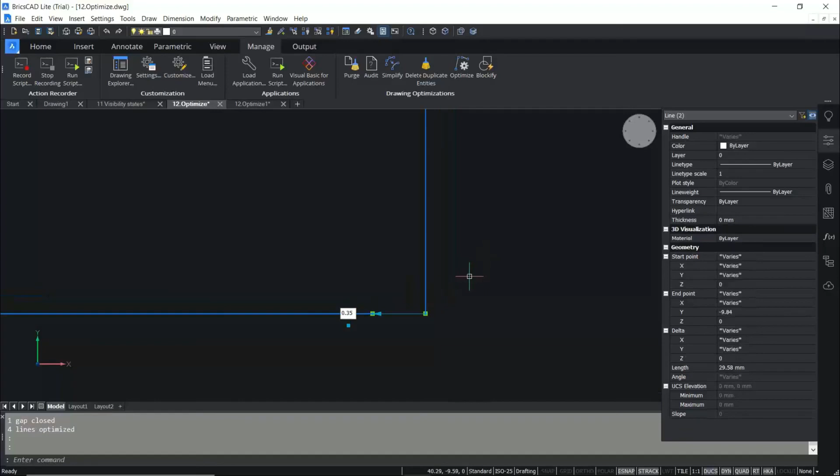I'll just select these two lines using the nearest distance option. You have got the gap between these two lines as 0.35. So this is where you control the gap tolerance. I'll go to optimize feature, and we have a gap tolerance here. I should give a value which is more than 0.3, so I'll give it 0.5.

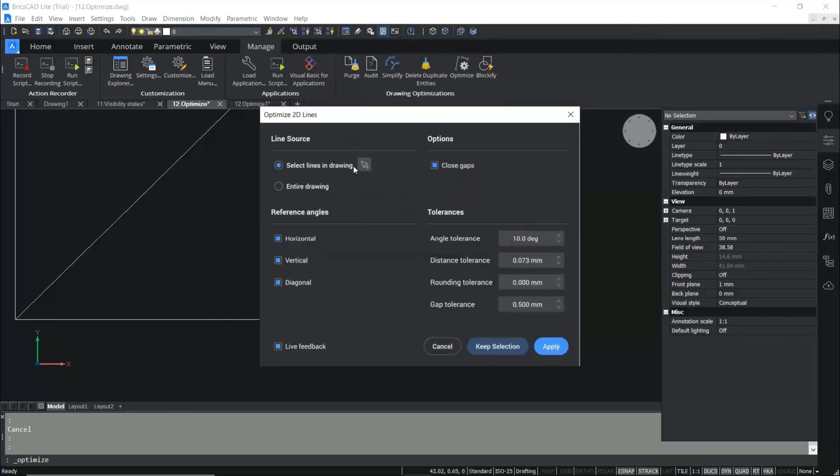Apply this. 0.5 when applied - oh, so I didn't select it, sorry. I have to select these two lines, right? Applied. Now the gap is filled, because we have given a gap tolerance value which was above the value of the existing gap. So optimize is a real time saver.

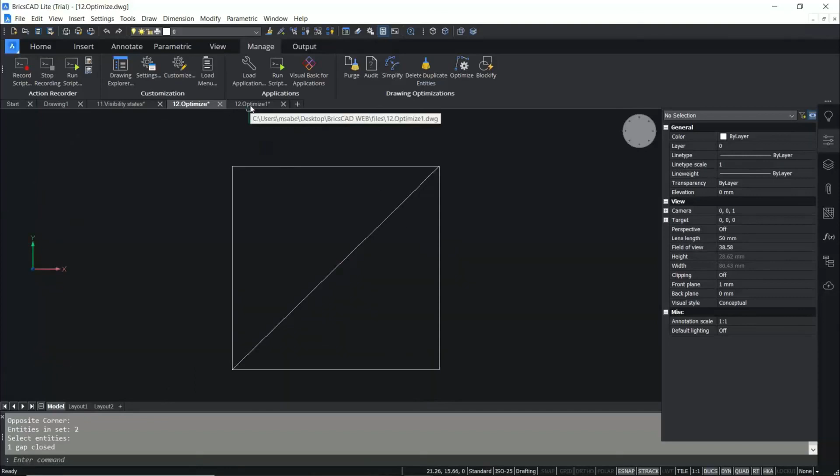And you can also try it on drawings like this, but you have to give higher values for gap tolerances and angle tolerances to perform the cleanups. So I think I have covered some of the key features, some of the most intelligent features which we consider in the latest version of BricsCAD.

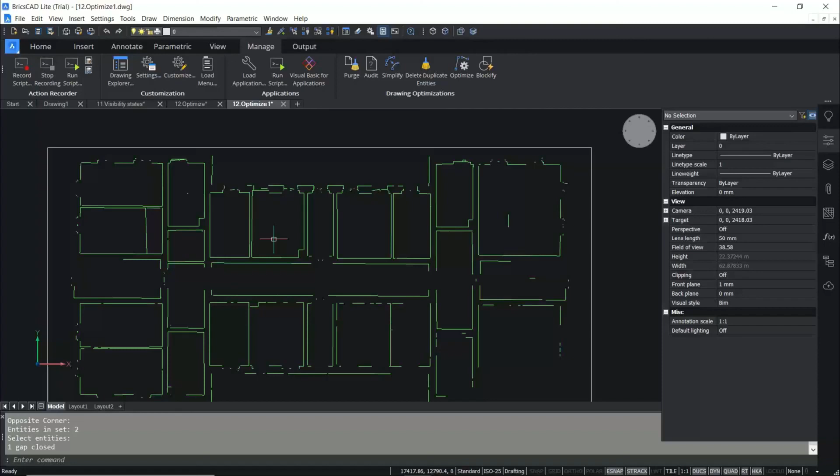Let's have a quick recap of the amazing machine learning and productivity tools we saw today. Optimize helps correct drawings through our preferred parameters. Boundary detection, a real-time selection tool for bounded elements. Quad cursor and hotkey assistant work well together to intelligently suggest tools we might want to use depending on the element we are selecting.

Visibility states, which is a step beyond the usual blocks. And speaking of blocks, we also saw Blockify, a smart tool that helps us easily identify similar geometry and instantly create block definitions. Even beyond Blockify are 2D parametric blocks, which go hand in hand with the auto-constrain command. We have copy guided and move guided, which increase efficiency by letting us skip numerous mouse clicks for drafting work, which we otherwise could have done manually.

And let's not forget dynamic dimensions, nearest distance, and the rollover tips, smart tools which support our efficiency. I'm glad that we were able to explain how these differ from traditional tools. What we showed now is BricsCAD Lite, but when you download the free trial, you're able to try out everything.